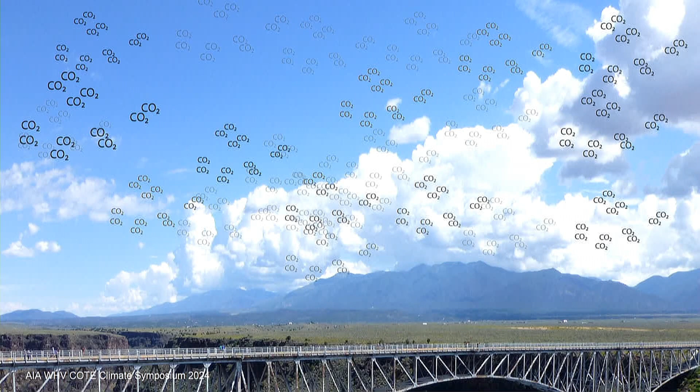Water vapor is also a greenhouse gas. Water vapor and stratiform clouds contribute nearly three-quarters of the heat re-radiation, three-quarters of the greenhouse effect. Carbon dioxide is just 20% of the greenhouse gas mix. Though only 20% of the mix, carbon dioxide's greenhousing effect controls 80% of the impact.

Heat re-radiation from atmospheric CO2 increases air temperature, which in turn influences the air's moisture content. But unlike water vapor, CO2 neither condenses nor precipitates from the atmosphere. It stays there, re-radiating heat and enabling higher levels of water vapor, which do so as well.

This nebulous thing called embodied carbon is one of the few warming accelerants that we can minimize within this decade, something that everyone in this room can do.

What are embodied emissions? That depends on your perspective. To some, it's manufacturing emissions, the emissions associated with producing a product. That means from raw material mining through production and packaging and everything in between, from cradle to the shipping dock. To others, it includes transportation to the construction site, or maybe installation or maintenance, or repair or refurbishment, or disassembly and disposal, or preparation for eventual reuse.

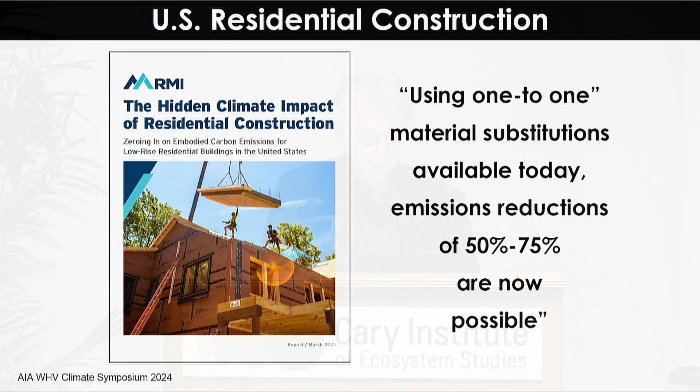Reductions like this are available in all phases of construction, and all of this starts with architectural design. The power to reduce those emissions resides with all of you. It simply requires your sensitivity to embodied emissions, plus some creative thinking. In other words, relating spatial, structural, and envelope design to material selection while cognizant of embodied carbon. The same is true for fittings, fixtures, and furnishings. We need to realize that sustainable design commences with low carbon construction.

Some of you might ask, with wind and solar and electrification on the rise, why this sudden emphasis on upfront emissions? To answer that question, let's cut to the chase. Let's connect a few dots. Let's look at carbon emissions and the warming timeline.

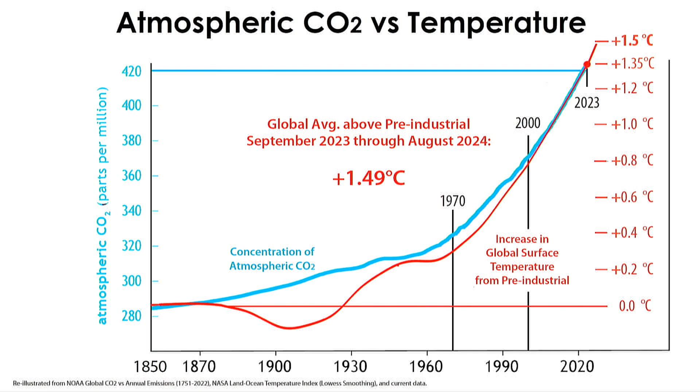I created this graph in March for a keynote at AIA's COTE Symposium in April. This is what it looks like now, updated through this August. A bit shocking. The average for the 12 months through this August was even higher, 1.49 degrees Celsius above pre-industrial. We've continued to break global temperature records each month. These increases were driven by the increasing concentration of atmospheric carbon dioxide. Temperature increases are nearly linear now with the increase in atmospheric carbon.

But notice the blue line, the level of atmospheric CO2, it continues to climb. Why? Because CO2 emissions remain in the atmosphere. They are not reduced as emissions decrease. New emissions are additive. They will remain in the atmosphere for centuries.

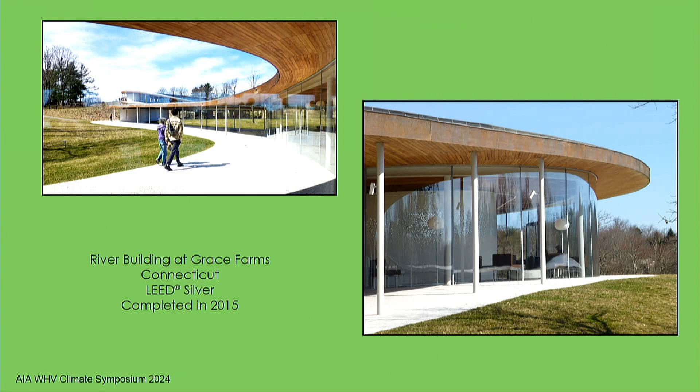Oh, how about those full-height glass panels? They were manufactured in Germany, then shipped to Spain to be curved, before coming to Connecticut. Sustainable design? What were they thinking?

This computer science building at Cornell University, my alma mater, was finished in 2014, a glass-clad structure with steel sunscreen appendages to block heat-inducing sunlight. This is the north side of the building. According to Cornell's Sustainability Office, these angular sunshades contributed to the structure's LEED Gold certification.

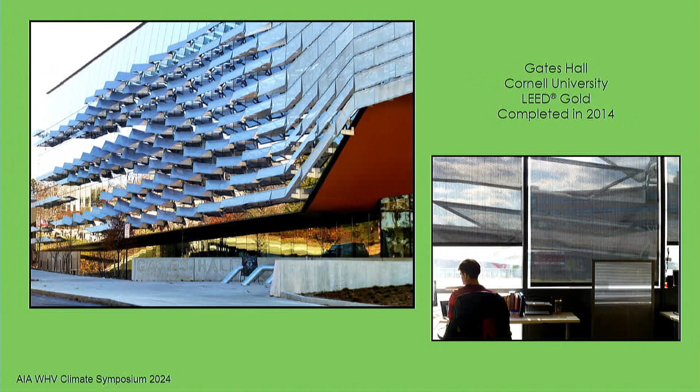Nonetheless, the intense sunlight from the east and south necessitated additional interior pull-down screens to screen the exterior screens, as you can see in the photo on the right. Why one would design a computer lab with floor-to-ceiling windows that admit sunlight and glare, I'll leave that to you. But it's hard to ignore the addition of steel sunscreens on the north side of a building in the northern hemisphere. Steel emissions are in the same league as cement, responsible for about 8% of global energy-related emissions. Was this just for aesthetics in the name of sustainable design? What were they thinking?

What about solar panels? Do rooftop solar installations generate enough energy to justify their embodied carbon footprint? Not this one in the Hudson Valley, shaded by trees. I hope none of you own this house. See, it may reduce the homeowner's electric bill, but this one is a net negative for carbon emissions, probably for its first decade of operation. And this is not uncommon.

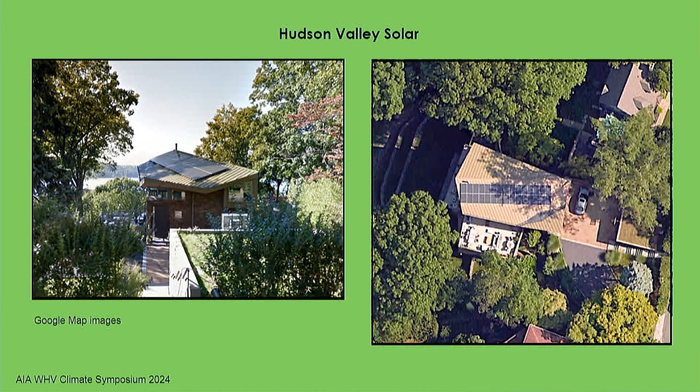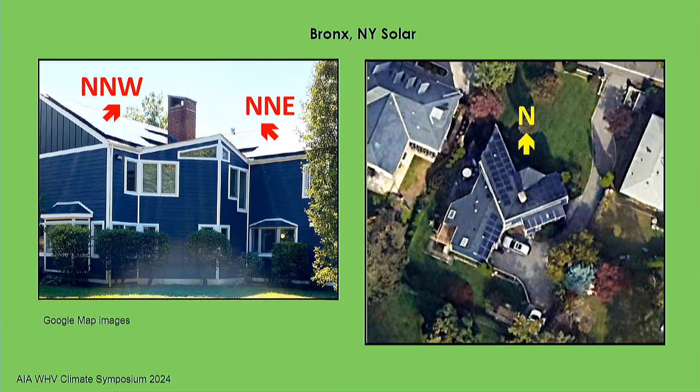Not all rooftop solar installations justify their embodied footprint. Southern regions in the U.S. receive sufficient irradiance, but northern states have 10 to 25% lower solar exposure. With shade from buildings or trees, or poor directional alignment, they will actually add to global warming for a long time.

For all of these projects, and numerous more like them, the answer to what they were thinking is simple. They were thinking about fluidity of design, in some cases perhaps sustainable design. The thermal mass of concrete, carbon sequestering wood construction, the benefit of sunscreens, and why not add solar panels? But they weren't thinking about embodied carbon, about upfront emissions.

So let's focus now on you, the professionals who design and construct our buildings and infrastructure. Let's borrow a phrase from our Department of Homeland Security: if you see something, say something, as early in the design process as possible, before it gets baked in.

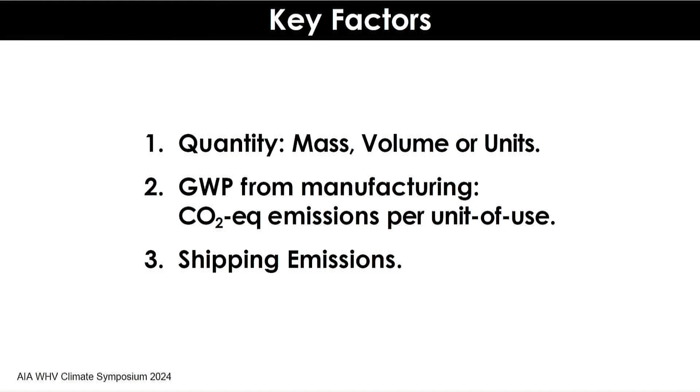How many of you have actually used EPDs? Show of hands. Okay, well maybe I caught you in time here because I'm going to tell you a few things about them. If you've tried but couldn't find many, you're in a majority.

Nonetheless, they will become obligatory.

How many of you are familiar with New York State Executive Order 22? Again, only a few. It covers new construction, 5,000 square feet or more, or significant renovations for New York State agencies or departments under the governor's authority, which includes universities. The exception is the Port Authority. Permitting requires that design teams calculate total embodied carbon, including from shipping and for transportation and construction equipment.

Bidders are required to submit EPDs when available for covered products. Executive Order 22 has been in effect since January 2023. New York City followed in similar fashion with Executive Order 23, requiring submission of EPDs for concrete and steel to Building Transparency's database. EPDs are also required for IRA funding and Buy Clean programs.

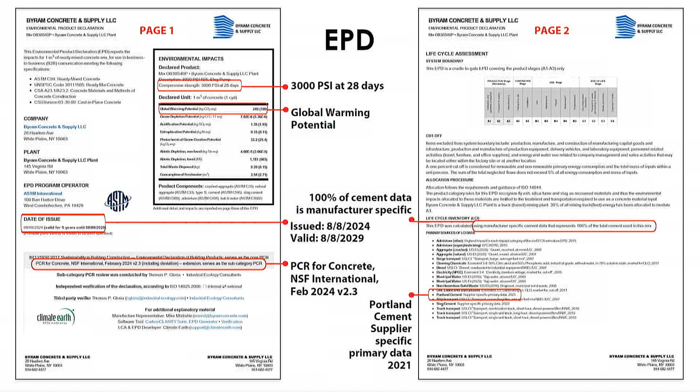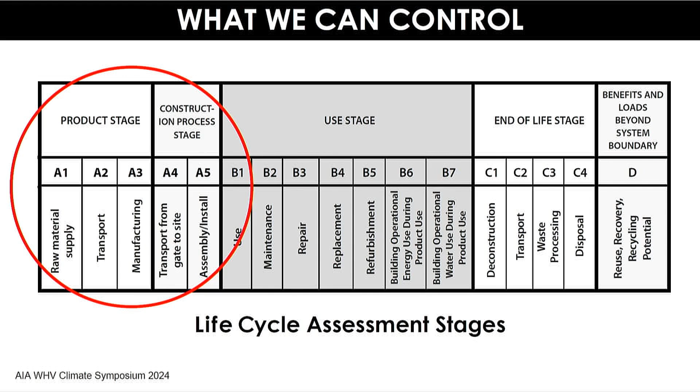Modeling is crucial to sound design decision making, from structure and envelope to environmental control systems, and a host of other parameters. How do we handle the EPD problem? Modeling and detailing are at different ends of the spectrum—that's if you model to design rather than model what you've already built.

Industry or manufacturer average EPDs or database averages are sufficient for modeling design schema comparisons, whether for the structure, envelope, or interior. A GWP estimate for modeling can be determined from most EPDs, even for those which may seem somewhat misleading. Just be sure to factor in the caveat.

Comparing design approaches can be accomplished with generic information, but detailing is another matter. Ultimately, success or failure of a low-carbon project will be cast by the structural and aesthetic decisions carried out through detailing and locked in by a spec writer. And that's when emissions comparisons become critical, ultimately relying on the veracity of specific EPDs. Until we have a sufficient supply of EPDs and widespread comparability, low-carbon design will rely on your creativity and your skill sets, your design and material choices.

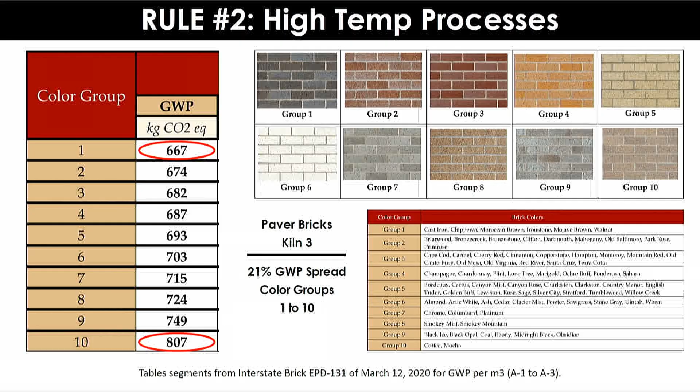Rule of thumb number 3, check a product's material content. You can't tell a book by its cover. Many construction products are composites of materials, such as for roofing and siding. The principle of mass applies here too, the mass of high GWP constituents. Of course, whatever the product, let's not forget transportation emissions to the construction site. But if you can only handle one of the above, make it rule number 1, use less.

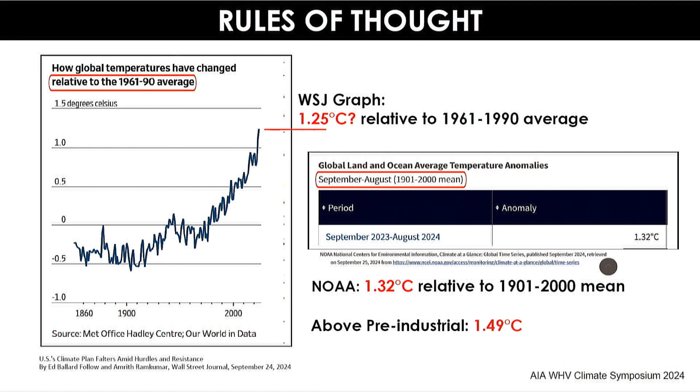So we have choices. We can ignore the details, comforted by our faith in the press, and install green appendages to please a client or as a feel-good green. Or we can meet the letter of new building codes and new climate regulations rather than the spirit. But none of this will reduce carbon emissions soon enough to make a difference. We must take it upon ourselves to act.

I came across an excellent report that might help, published by the World Business Council for Sustainable Development: Net Zero Buildings, Halving Construction Emissions Today. The report provides excellent strategies to reduce embodied carbon. It's available for free download at wbcsd.org. I highly recommend it.

For a more complete picture of the mindset we need going forward, and how our love affair with all things green and sustainable got us here, my book might help: Thwart Climate Change Now, Reducing Embodied Carbon Brick by Brick. I wrote it to be a solutions-oriented eye-opener.

It comes down to our creativity, to our personal decisions. With approximately 120,000 registered architects in the US alone, about 3.2 million estimated worldwide, we can make a huge difference. And that doesn't include interns or other design professionals and the rest of the AEC industry. This is an enormous amount of specification power, capable of minimizing upfront embodied emissions through low-carbon construction.

Keep in mind that embodied emissions from construction materials are released years before a building is ever occupied, years before infrastructure is ever used. That is why your ability to cut upfront emissions through design and by material selection matters so much, why it is so important.

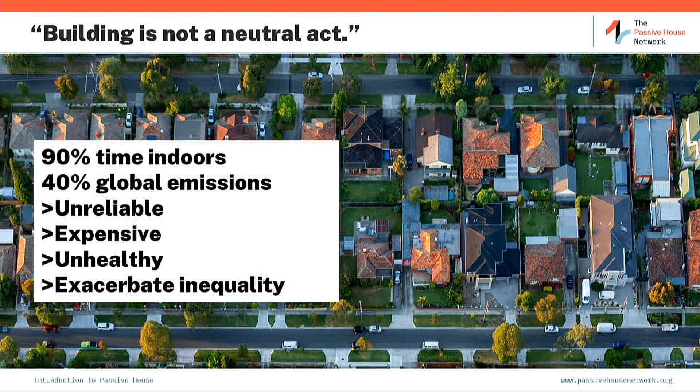So we have our engineers oversizing mechanical systems as a perfect illustration. Nobody trusts that the building will actually operate the way we think it will. They tend to run more expensive than we think. They can too often be unhealthy to the occupants and exacerbate inequality as we see the disparities in investment in our physical structure and everything that happens around that. So all items to be addressed.

And we really do want it to start with the occupants. I liked the upfront talk by Josh, about human resilience as being a key part of this, and human health. And our buildings are a big part of that.

So basically, we're going to have two types of buildings: buildings that are prepared for climate change, that are helping mitigate and adapt to it, and those that are not. So one of the themes that we have is to future-proof our architecture. We want to build something today, and we can do it, that will last through the coming decades, which are going to be quite harsh.

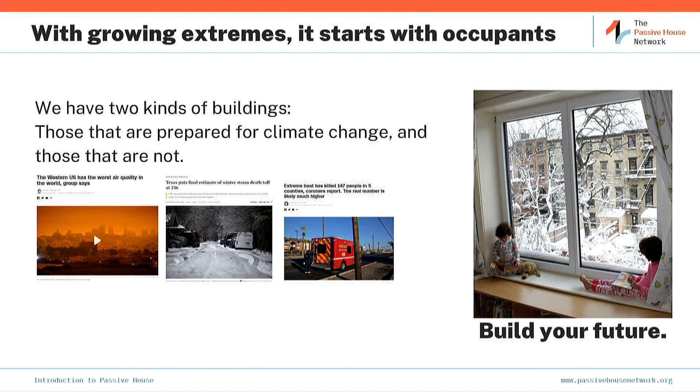And I think an interesting thing for me in getting into it, and for many, is that Passive House is focused on energy efficiency as a driver of building performance. But there's a realization that efficiency wasn't necessarily about sacrifice. It wasn't really about settling, which we can sometimes think of it as. It really can actually drive fundamental performance.

So things like comfort and bringing down emissions, having health, sustainability, lowering risk. All of these things are goals that we want out of all of our projects, right? And efficiency can actually help us get there, and passive house as a methodology, which we'll dive into.

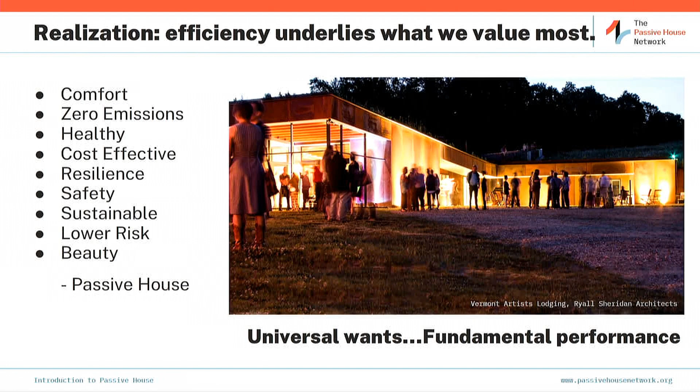Another aspect that excited me as an architect, I see it with other architects and builders and everyone in the projects, is that it's empowering the architecture again. You know, before World War II and the advent of mechanical systems that could compensate for really terrible building enclosures and generally building design that disregarded the environment around us.

There's a tradition of vernacular architecture, medieval, ancient, indigenous architecture that engaged fundamentals. And it allows us to re-engage those fundamentals. It empowers the building elements first before we go to the mechanical systems. It gets us back into the details.

We'll talk about how we're really using the same bricks and mortar, and we'll talk about the upfront carbon a little bit. But how are we using those things? So it's putting, I would argue, more power back in the hands of architects to use the structural design, the enclosure design, the form to drive the final performance of the building, and the builders along with it.

Empower electrification, we hear a lot about electrification and renewable energy production. The fundamental issue with our status quo, moving to electrification and renewables toward a net zero home, is that our demand and production are not in sync with each other, and we're inefficient in how we're using the power.

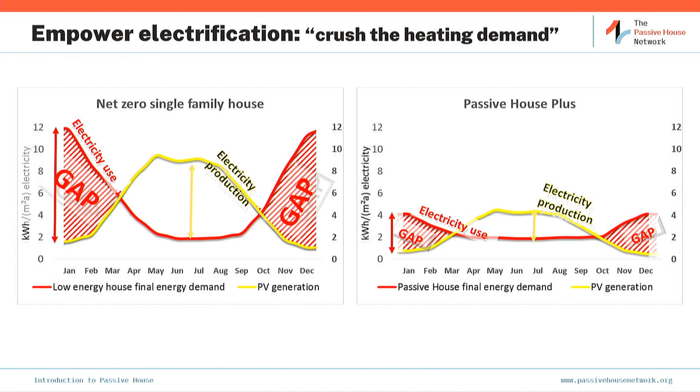We can lower the electric renewable production and kind of tune it to the future renewable grid, because today—this is from California, hopping back and forth, but indicative enough—space heating is really dominated by fossil fuels, right? Hot water also as well.

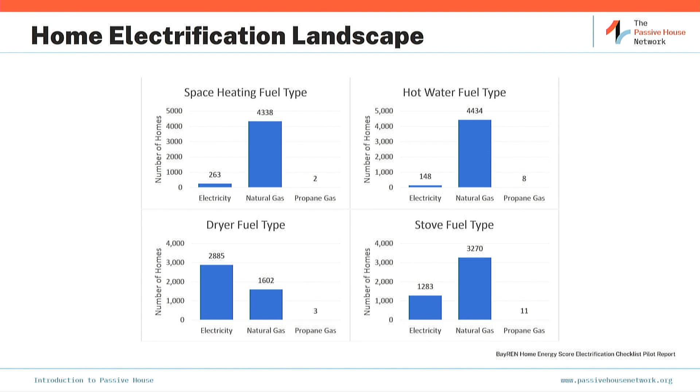And so as we move this towering demand over to electricity, what are the effects that it's going to happen? Now, Massachusetts has recently mandated—they've moved away from EUI, won't get into too much detail—but they've mandated what is called TEDI, Thermal Energy Demand Intensity. It's basically the heating and cooling of the building that's going to drive their building code for commercial and larger buildings. And for multifamily buildings, for the jurisdictions that adopt it, passive house certification is actually becoming a requirement for multifamily over 12,000 square feet.

That's one hell of a thing for a state to do and to regulate, especially this. I mean, it's late, as Bill pointed out, but it's still early in some ways in terms of the industry adopting this.

And Massachusetts' infrastructure is not prepared for this. Nobody's infrastructure is. They're looking at tens of billions of dollars of investment just to get through the next decade. So what they see with Passive House in crushing the heating demand is a grid-friendly way to develop buildings going forward. It's actually an investment in the grid through better building.

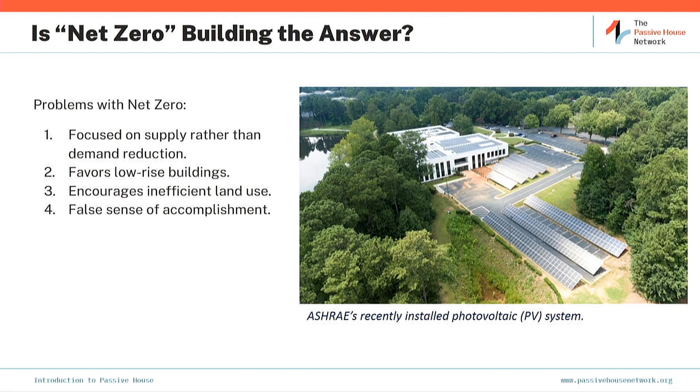So I'm not here to rail against net zero per se, but to say that some of the conventional received wisdom in terms of how the market is moving and what people are asking for—like if the client wants to have solar panels on the building, we're going to end up with solar panels on the building—we could have a wider conversation about that.

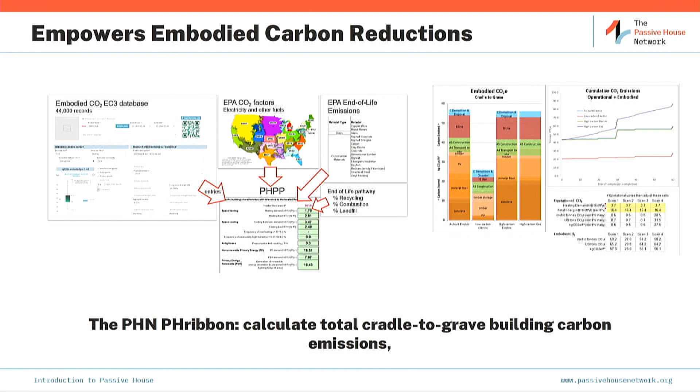Addressing embodied carbon is hugely important—upfront carbon in particular, from the manufacturer to the installation. In Passive House we have a tool called the PHribbon, pulling from the EC3 Building Transparency Database, so the information is as good as what is being supplied. But you can actually look at the embodied carbon outputs of the building design along with the operational energy, so you're getting a more complete picture. One key aspect is material substitution—we want to use less. Less is more, but also substitute materials. We can add more insulation if the insulation is actually zero emissions, or even negative emissions, and help at the end of the day with the overall carbon profile.

This is not core to Passive House, but Passive House practitioners often do it out of a mission around climate, as well as other benefits. Upfront carbon concerns are a natural pairing with it. And we want to note that it works with all the other codes and standards—you don't need to pick and choose, though you can if you like.

This is the Winthrop Center Tower in Boston, completed the other year—the world's biggest certified office building, over 800,000 square feet. They did LEED Platinum and WELL, as well as Passive House. So we want to look to that—blending whatever makes sense for your project.

This is the heart of it, in a way—what Passive House does in transforming it is like we've got basic ingredients of building, like cooking. It's how we use those fundamental elements that really matters. I really like this book, Salt, Fat, Acid, Heat. If you know how to manipulate and use these basic elements of cooking, you can make a great meal no matter what is getting thrown at you. You know how to bring that out of the ingredients for the food.

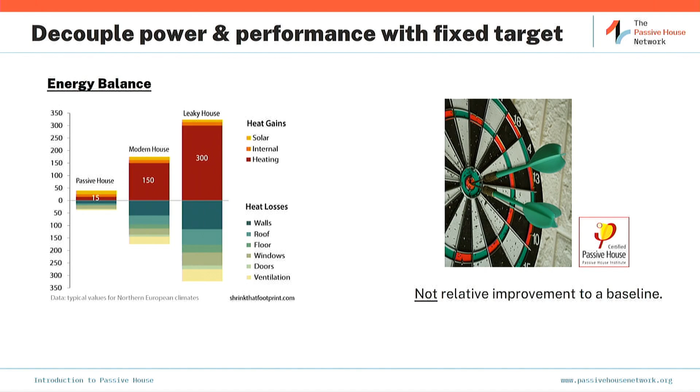Modern houses are doing better, cutting it down. A passive house really pushes it down to this physical definition and crushes the heating load, as our friends in Massachusetts say. So this reality then is something that we want to make predictable.

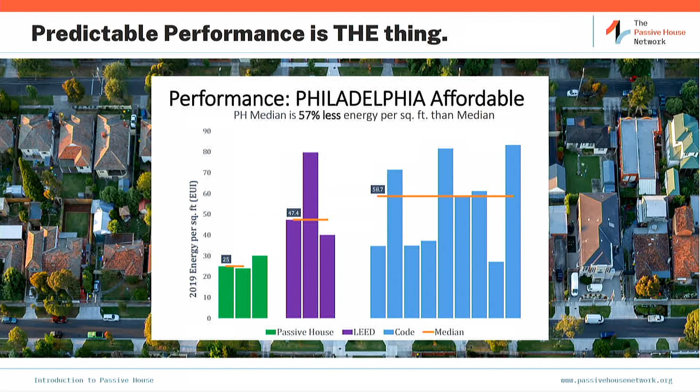It's not really locking it in the way that we need for predictability. A passive house is lower, and it's in a lower level of variation between the worst and the best. And it allows you that predictability in the outcome through the methodology.

Another interesting aspect, which we won't go into a lot here, but you can look at EUI, you can look at the operating carbon emissions of the building through passive house. It's not that it doesn't exist, but the focus is shifting to its compatibility with the all-electric, all-renewable power supply. So we are saying, yes, politics may have a way of making it a very bumpy road, but we're going to an all-electric, all-renewable reality in the not-too-distant future, if we have any sanity.

And so how well does our building function aligning with this future? It's not really about the emissions of the production anymore, although we want to minimize the amount of those solar panels that we're building, minimize the number of windmills, minimize the number of dams that we need. It's really the simultaneity of the use, depending on the use, on a daily level, but also on a seasonal level, and reducing short-term storage needs and losses, and then long-term seasonal losses, and minimize those inefficiencies.

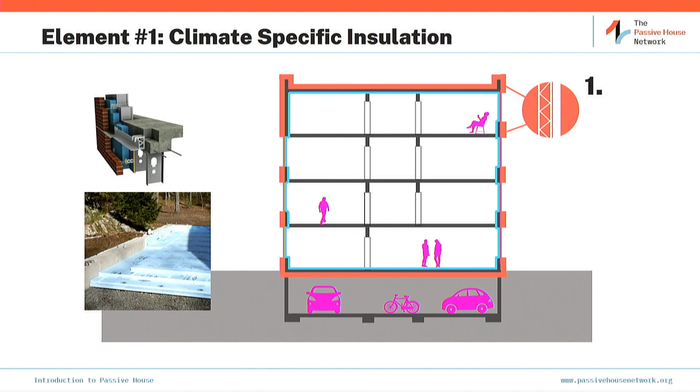Like many of our kids, we want to wear a parka and a hat and gloves and a scarf, and know that we're dressed for the weather. We want our buildings not to be like the kids in hoodies, or adults in hoodies for that matter, but dressing for the weather, like a climate-specific rated sleeping bag, perhaps. Again, minimizing that heat load requirement.

Thermal bridge-free construction is one of the fascinating things. We don't want to undermine the insulation. So studs repeating, and metal studs with insulation in them, can be horrible thermal bridges. But where it gets more interesting is at those connections, between the wall and the floor, the wall and the roof, where structure comes through.

So here's an example. Again, not rocket science here. I mean, there is some math going on in the programs and whatnot, but you have some insulation coming here, and underneath this floor and wall, they have a piece of masonry supporting it structurally, but its thermal properties are bad. It's creating a thermal bridge. It's not acceptable. We don't need to go into all the details of it, but to say that by simply changing out one material for another, in this case aerated autoclave concrete block along there, we can change the thermal dynamics of that corner and eliminate that thermal bridge.

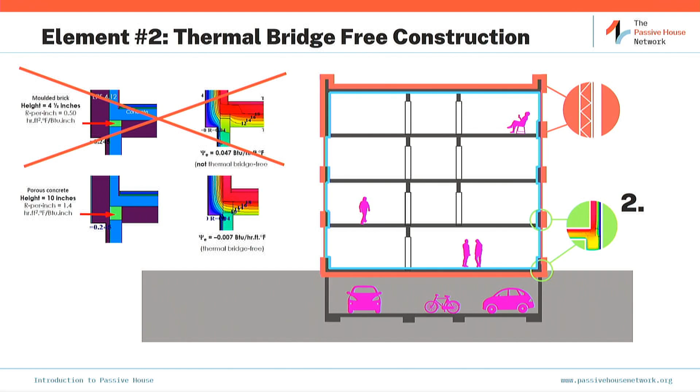Adding up all these thermal bridges and putting them into the energy model, they can have a gigantic effect on the overall building energy use. And it's one of the reasons why mechanical engineers will want to oversize the building's mechanical systems.

They can also undermine comfort and health. If we have thermal bridges and the interior surface temperatures aren't high enough, and we have relatively high indoor humidity, we can have condensation and mold and things that drive sickness. We have energy loss.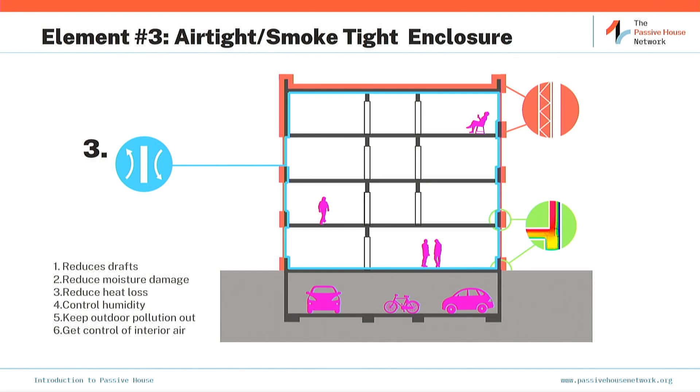Like a windbreaker over a fleece sweater, it's enhancing the power of the insulation as well. Think of the windows and doors as climate specific; they're extensions of the insulation layer, of the air tightness layer. So typically in this environment, we're going to have triple pane windows. We're going to have truly thermally broken frames. It could be of almost any material and construction type, depending on the project and the specifications.

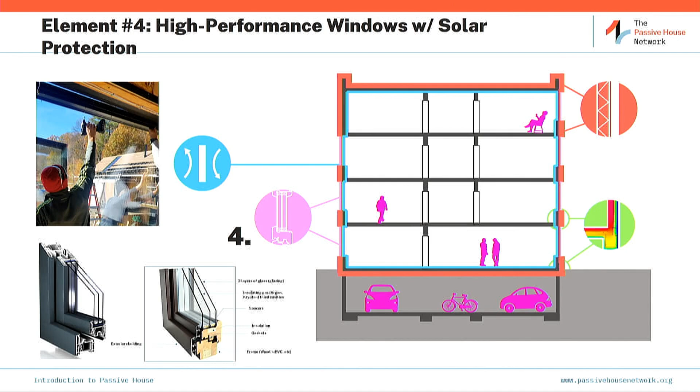We're not using them just for views. We are using their passive solar collecting ability to help provide passive heat gains, but we don't want to over-rely on them. We don't want to overheat the building unnecessarily. And so part of that is to be really cognizant of what we're doing with the orientation of the windows, but also have solar protection.

So use all your space comfortably. You can go right up to the windows. Yeah, big driver here.

So basically, with typical windows, the surface is going to be too cold, right? You're going to have convective currents, and you're going to feel the radiation loss off of your body. We need to put mechanical systems at the perimeter. With a passive house, we want to bring up that surface of the window close enough to the indoor air temperature so that you're not feeling that thermal discomfort that has to be overcome with mechanical systems at the perimeter. Consequently, we can pull the mechanical systems back to the interior.

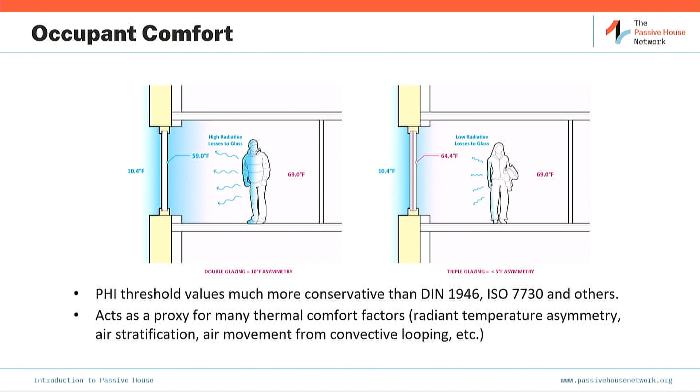Here's the shading. So shading, we want to consider and include it. Going pre-World War II, modern architecture back in the day had lots of built-in shading. Think of great Corbusier projects. They were terrible thermal bridges perhaps, and the upfront carbon wasn't so good, but he had the shading in, and we really need to bring it back in a big way to have the focus on that.

Thinking about the landscape, architectural elements, the window pockets. You can have occupant-controlled shading, of course, but the less occupant-driven performance, the better, obviously. So really, again, investing in the architecture.

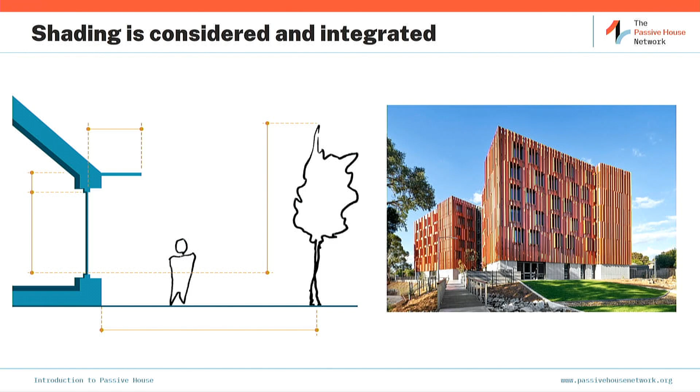All right, so those 4 things give us the basic envelope enclosure performance, the basic elements of that, and then the ventilation.

So the ventilation is being supplied 24/7 to all the served spaces. Fresh air is coming in, filtered fresh air. It's going into the bedrooms, the living rooms, the classrooms, the offices, the conference halls, and being exhausted from the service spaces: the bathrooms, the kitchens, the utility rooms, hallways.

It's balanced, and it's relatively low flow for what you would imagine, because we have control over that air now with the air tightness. So it requires a very small amount of energy to maintain a high level of quality. And with that air, we're going to recover a ton of the heat that's coming through.

Yeah, fewer allergies, less asthma, more healthy.

And what's happening in terms of operation is just a fan, like our bath fan or kitchen fan. It needs to be a very efficient fan, but the heat recovery is happening as the extract air is going through a heat exchange core, passing by the supply air. And we can now recover over 90% of the heat.

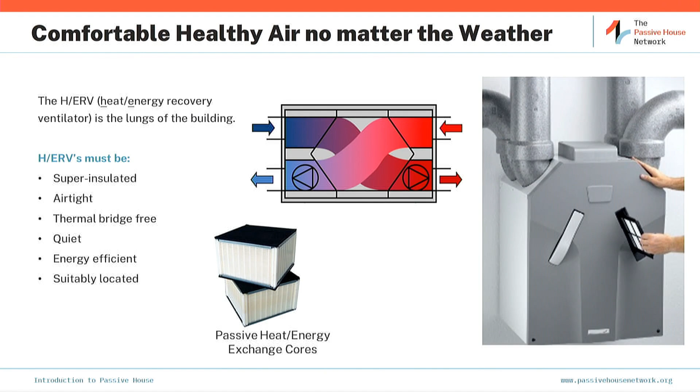So even in the cold of winter, you have fresh air coming into the room within a few degrees of the interior. You're thermally comfortable. You don't need to compensate with heating or cooling for it. And the ventilation efficiency, once you dive into it, is hugely important in terms of the overall energy balance of the building.

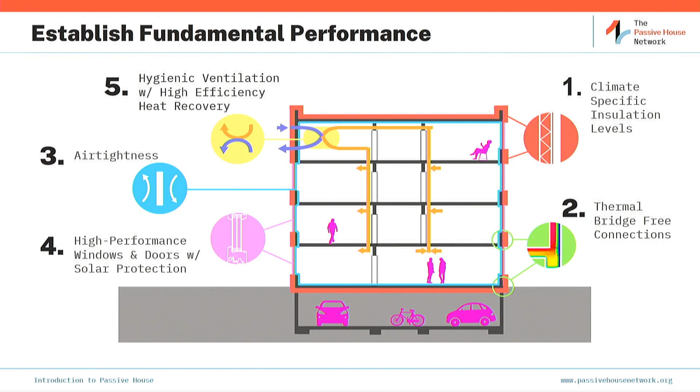basic elements, are salt, fat, heat, and acid of building.

So those are the basic elements. Then we've got control, then we're right-sizing the heating and cooling. We still need them. Passive houses do have heating systems, they just should be really small heating systems.

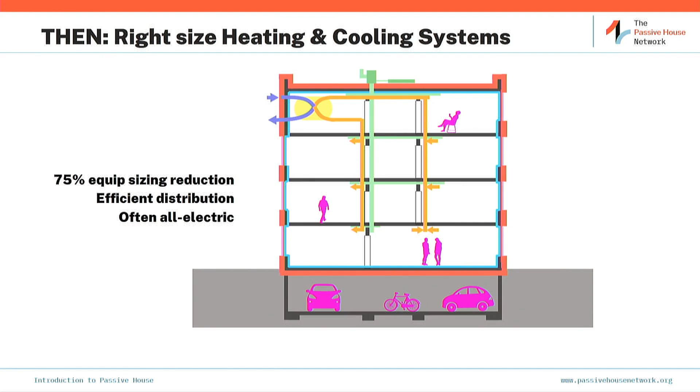So we're looking at typically a 75% reduction. That house that I got when I started doing passive house was a retrofit of a 5-story townhouse in Brooklyn Heights. It was like 5,500 square feet. It was a big house. And all the neighbors, similar houses, had 12 to 15 tons of air conditioning on the roof of the building.

And it was in a historic district, and there was nothing landmarks could do about it because it was the mechanical system. We calculated the heating and cooling demand, and we calculated that we needed 1.5 tons for our building, which is a really scary thing when your client's spending a couple million dollars renovating their new home, and you're saying, well, the equivalent of a window unit for a typical living room would be sufficient for that.

And it is the methodology and the calculations that give you the confidence and predictability to actually do it. Now there's variation, right, and that was at the optimistic end. So we did install 3 tons, but it's between 1.5 and 3 tons, right? It's really still a pretty flat line in terms of the use. Very happy to report that the house went through the summer heat and the winter cold fine.

So we want to downsize those systems. Typically they're all electric. We can have smart controls and renewables too, but we want them to come after we've made a great building, so they should enhance high performance, not compensate for poor performance. That's really the key thing: start with something great, make it better. Don't do something poor and say it's good enough because we've put stuff on it. So it's all about this optimization.

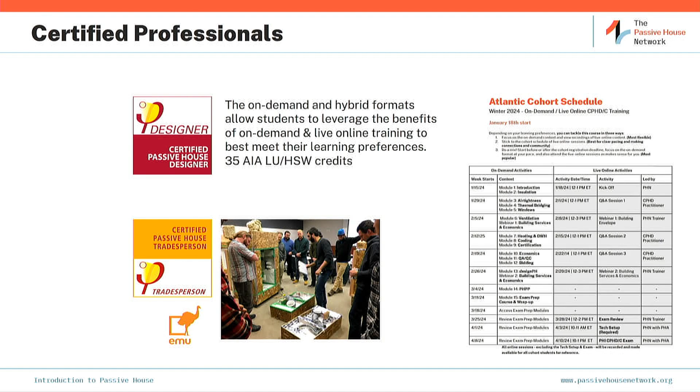There's also tradesperson in the PHI universe, certified passive house consultants and builders, a whole world of certified people working on projects. There's also components, which can be hugely helpful, especially the critical ones. We talked about the windows, the ventilation system being really incredibly important. These have been tested, and the specifications are in the models, which helps with predictability.

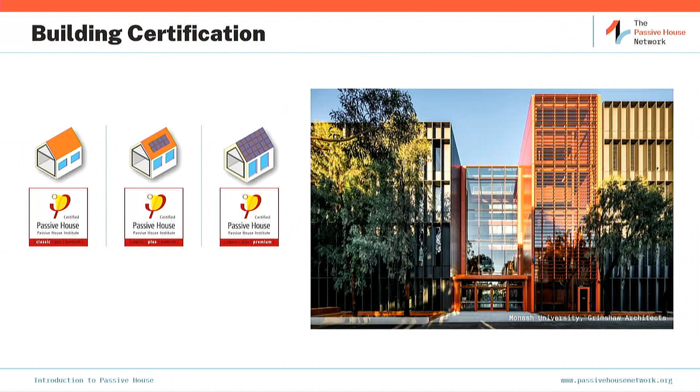And then building certification—I'm not going to go into the building on the right, but I'll note it's by Grimshaw Architects in Australia. It does not look like a passive house, I'll tell you. It's a huge building, worth looking up. But there are different certification levels and different types with renewable and electrical balance included.

So just a quick run through some examples to show that anything is possible. We're still dealing with the physical reality—architects don't have too much of a problem, once out of school, dealing with gravity. We have to deal with gravity as architects, but we need to treat energy the same way and see how our designs are reacting.

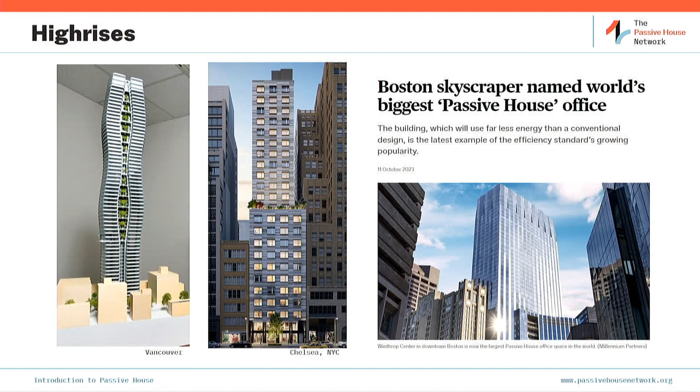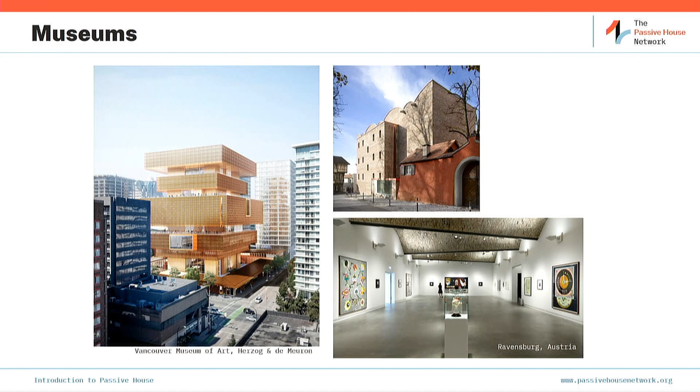We'll see if this one on the left ever gets built—it's been through like 100 iterations that really have nothing to do with Passive House. Most of the time, when I'm talking to somebody and they're venting, their Passive House vent comes to me. It's like, we're having this problem, that problem, blah blah blah. And we start to unpack this—what are we really talking about, what's happening here? More times than not, it's construction, it's design, it's clients, it's all the problems we have in making a building, which is really hard. It's not necessarily the Passive House aspects driving the problems, usually not.

Anyway, long story short, Herzog de Meuron is doing this big museum in Vancouver. The embodied carbon's not looking great at face value, but who knows what they're doing—they're a smart firm. The Belgian embassy in Kinshasa, Congo. An administrative building in Brussels—just all sorts of shapes and sizes. The university in Bar Harbor, Maine, College of the Atlantic, which is beautiful.

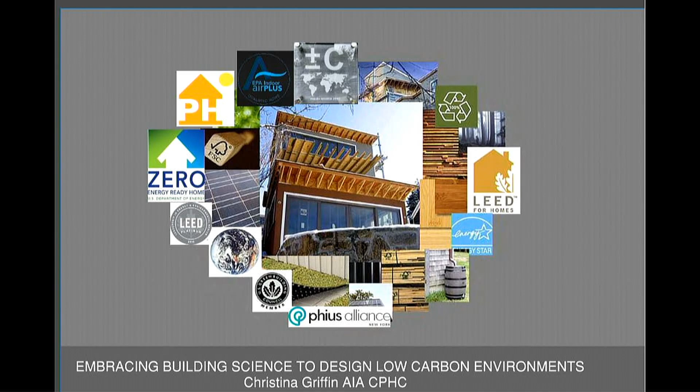Since then, I have been doing Passive House projects, and I'm going to show you 5 different buildings, each a different type of project: a single family retrofit, a very old 1815 building, a new house, a mixed-use historic landmark building, and a new mixed-use building. I'm showing this to inspire you to see how we can make a big difference, and how the Passive House standard can apply to any building.

And of course, these are all the logos I've been collecting of the different standards we've been following to get us to this higher level of sustainability.

A little background before I go further - I had a practice for 36 years in Hastings on Hudson. I've always had a commitment to environmentally sensitive buildings, since I studied architecture during an oil crisis. But that seemed to completely go by the wayside during the 80s.

I learned building science along the way, taking many courses. In 2012, I took the PHIUS course in New York City. Katrin Klingenberg was my mentor, and she said the architects should set an example - if you build, set an example with your own home, which she did actually. So I decided as soon as I had the opportunity, I would do that.

I downscaled my big house a few years ago - well, it's actually a retrofit. I've been using my house as a learning tool, giving tours and talks about it at the local library. I've also been doing passive house workshops in my office, and a variety of things to help promote building in a more conscious, energy efficient way.

But the thermal bridge free concept, I describe it as - if you're going outdoors in the wintertime, what would you use if it's like 10 degrees? You would wear a down jacket. So I compare a passive house to a down jacket, because we want a really well-insulated building with continuous insulation, as airtight as we can. So you'd have a down jacket with a hood on, everything wrapped tightly around your face and hands. A thermal bridge occurs when you have a gap in your insulation.

I try to make it as clear and simple as possible so they understand. If you have a stud wall house, which most people have, each stud is a thermal bridge unless you have some kind of continuous insulation. It's almost like going outside with a denim jacket that has little holes in it.

So this is my own house that I started out with - a little house built in 1905. I actually looked for a house that I could change and make into a zero energy passive house.

I've had tremendous support from the U.S. Department of Energy - I've reached out to lots of different sources to learn about building science, and they've given me tremendous support, and an award, and just recently another one. What I like about the US DOE is if you look at their website, they have the WUFI software for free. I started using that about 10 years ago - it's the WUFI energy modeling. They've really been a great support. This is the house originally.

I start out by showing them a few plans. This is the original house on the left, in gray, and the yellow around it is the new build-out and thermal envelope. So we wrap that entire house with a new structure, a new thermal envelope. On the right is the fully developed plan with solar panels on the southeast plane of the roof, and we have a rain garden in the back that helps take care of stormwater for the site.

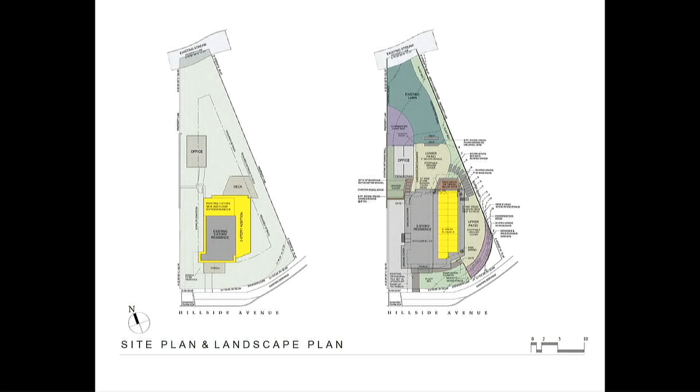We added space, going from 954 square feet to 1,700 square feet.

I show floor plans to my audience, who are mostly not architects, because I want them to see that you can have a really small house that can serve so many needs. If you look at it in a way that says if you conserve space, you conserve energy. So conserving floor area, you can do that by having a very open space. There's only 2 people living in this house, but we have 1 living space that's multifunctional, like before World War II, when most people had 1 living room, 1 dining area, 1 kitchen. All these spaces are located on the southern side of the house.

Orientation is critical because the primary source of heat is the sun coming through south-facing glass. So the front of the house has a porch with glass, and all the primary spaces we live in, and all the bedrooms, have south-facing windows. On the north side is where we located bathrooms, closets, and the side entrance.

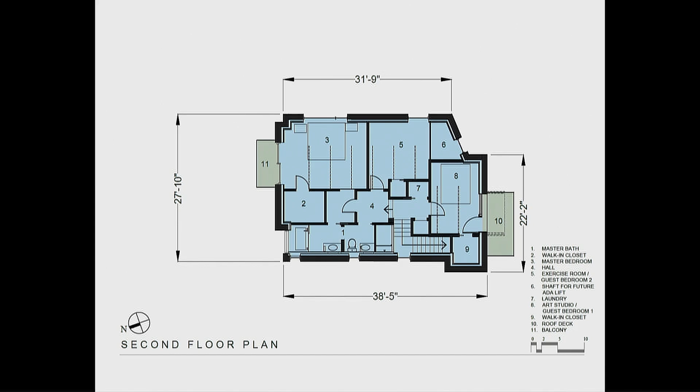These show that the design has a trellis and a porch, and inside the trellis, we found ways for solar shading of these windows facing south.

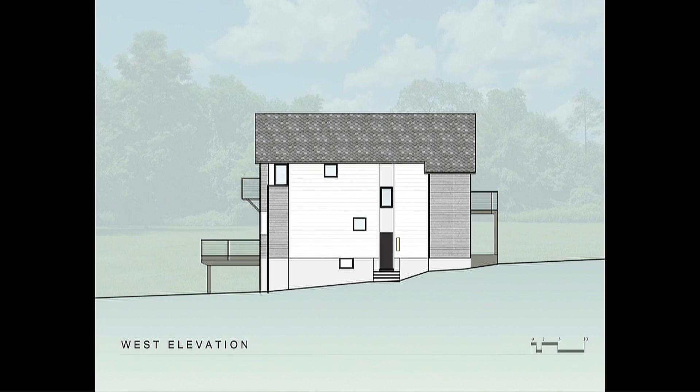We actually, to conserve on sending waste to the landfill, saved as much of the old house as we could. We saved 2 walls and the foundation because we didn't want to add concrete if we didn't have to.

This is just the detail of the thermal envelope. We have a double stud wall. I did this during the pandemic and wanted to keep it as simple as possible. We had 2 different contractors - the first tried to train their people but it wasn't so easy. The second knew more about passive house, but the stud wall kept it simple so any carpenter could build it.

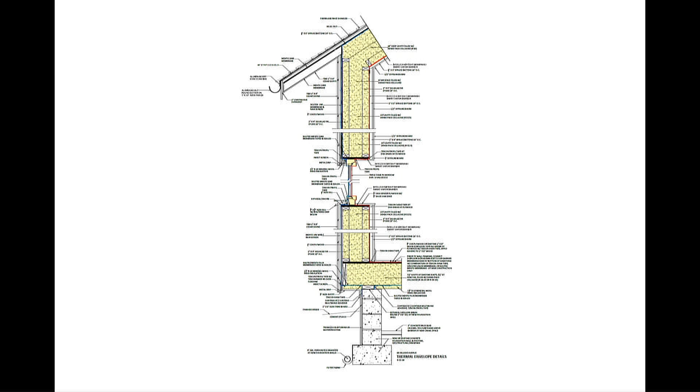We filled this cavity between the red line, the interior air barrier, and the blue line, the exterior weather-resistant membrane. Between those 2 membranes we filled it with dense packed cellulose, very much like a down jacket, where one membrane is for water resistance on the outside and the interior is an airtight membrane. You fill it with insulation.

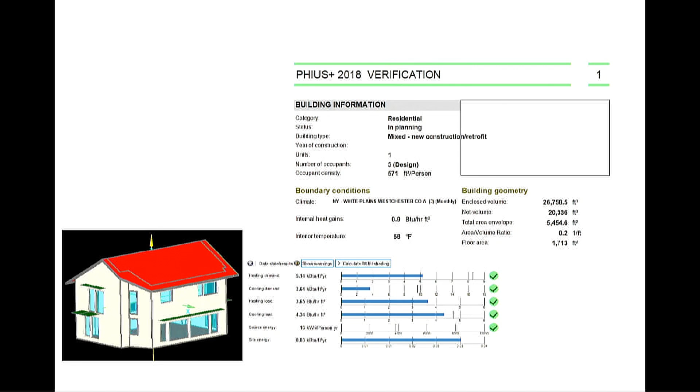This is the energy model we used, before the drawings were finished in the design phase. I start out by using a PHPP model to see if we're going to hit these targets. That helps determine where the glass is, how big it is, and it's all a matter of energy balance. So we had some glass facing northeast, but most of the glass faces south. You also see on the model our solar shading to help reduce the cooling load in the summer.

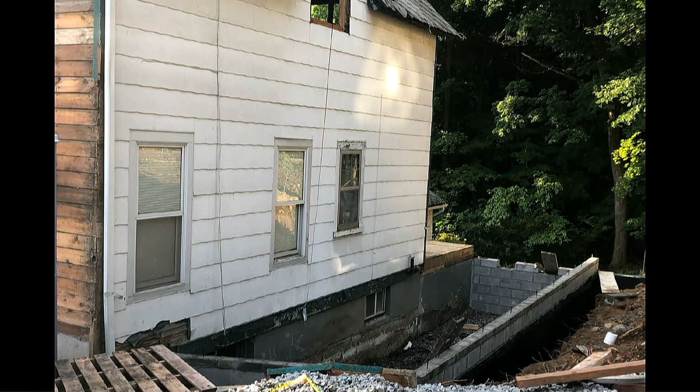This is the house when it was stripped. We decided we would save the framing on 2 sides of the house. We added 8 feet to the house, so we made it a little bigger than it was.

This is showing the double stud wall. The old house is in the back, and the new house is swallowing up the old house to create the new thermal envelope. We took out the sheathing and used cross bracing so that we could have continuous insulation between the 2 studs. Old studs are in the front, newer ones behind. Here you see all the studs, all this framing creating the envelope.

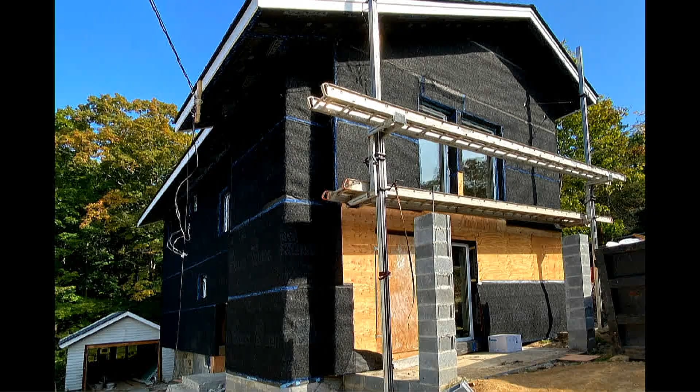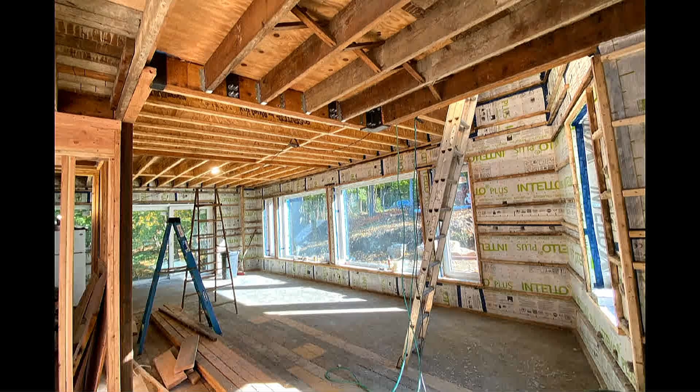This is our exterior envelope, the weather-resistant membrane, all taped and sealed. And this is our interior membrane. They call it a smart membrane because it's designed to allow vapor permeability, so if there's any condensation on the wall, it can dry to the inside.

You see all those horizontal strips of wood - this is to create our service cavity for the wiring. Second floor, you can see the interior envelope, the interior membrane.

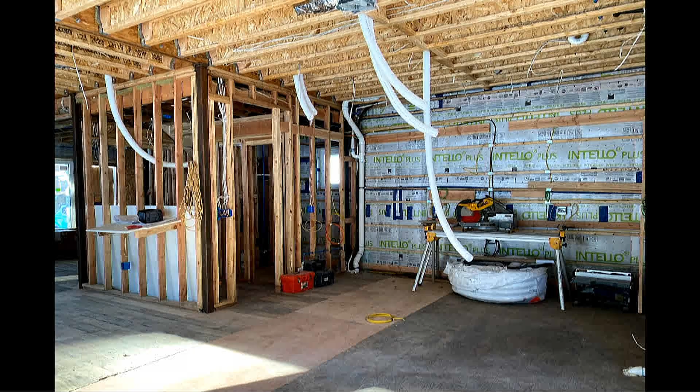Then we did our blower door test before we finalized the building, to make sure we're going to meet our targets. We sailed through - we had 0.02 CFM per square foot first test, but we ended up at the end with 0.05, and still met the passive house targets.

This is just these tubes falling down, coming from the ERV, the energy recovery ventilation unit. We have that up in the closet of the primary bedroom, and the tubes come down to provide supply into most of the habitable rooms, with returns from the kitchen and the baths.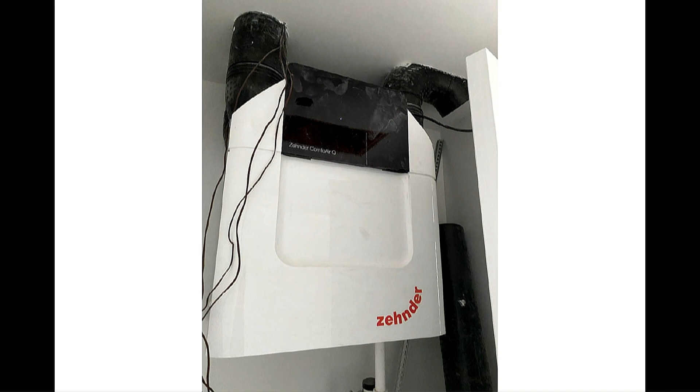This is our unit, which we had mounted so we could reach it. It's on the wall of the walk-in closet in the bedroom. We're so aware of this unit, and we love to show people how we use it and how we take the filters out. I really wanted to take the mystery out of passive house - it's a simple fan, really.

But I'm aware that we get about 1 air exchange per hour. So like during the pandemic, when people would come, we'd leave the house for an hour to feel comfortable getting back inside.

And this is all finished. We took out the entire lawn that was in the front and back of the house and put in a native garden.

What I think is really interesting about this image is you can see the amount of solar shading going on. We have the porch—this is probably in early August. We have shading from the front porch onto the glass next to the front door, and shading of that door almost completely by that trellis up there, about half at this time of day. I introduced this angle deliberately because I knew I'd get full shading of that tall piece of glass facing due south. Most of the year we have deep overhangs, and then a trellis on the side.

Just a few more photos of the house. I designed this trellis—very simply made. There's a bracket, a sample of this metal bracket, that I've given to different contractors to match. This was all designed using solar shading calculations, a very simple calculator you can find in various places on the internet, or from 475. By angling the wood like that, it completely blocks out the sun, and the depth of the trellis is based on this solar shading analysis.

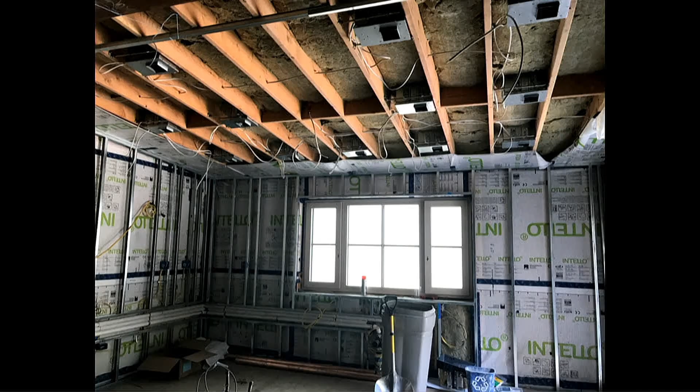This is such a great image because it was my client's idea, who had studied passive house, to hang the new structure—those joists running that way—from a big beam that's holding up the old stone wall. We ended up having insulation between the joists, wrapping underneath that beam and back up into the wall of the house, and that way we avoided a thermal bridge. The client, everyone, the head framer and myself were all knowledgeable, or became knowledgeable, and found a way to overcome these challenges.

This is the stud wall. I think we wouldn't use metal in the future, but he was a New York City contractor and had that material. We used dense-packed cellulose for the fill inside the walls, and then continuous mineral wool on the outside of the studs. This is a sketch on the right by the head framer, and this is my drawing on the left.

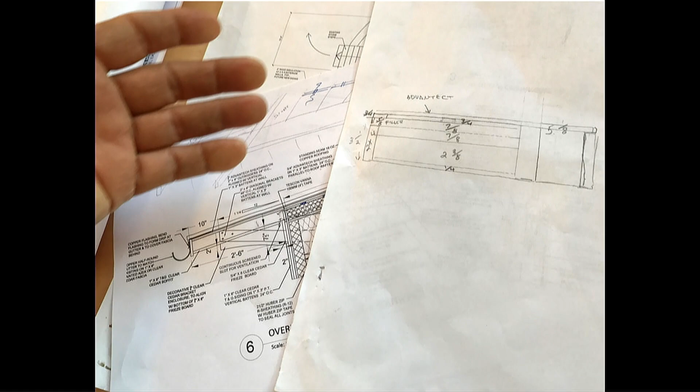I'm always amazed at the amount of collaboration that occurs to reach these standards, especially to overcome the challenges of thermal bridging. We have these decorative brackets added to the roof to mimic the brackets on the original old house built in 1850. He did this sketch showing layering the brackets with wood fiber rigid insulation to reduce the thermal bridging caused by this detail—those are the brackets you see under the overhang.

This is some of the views of the interior. This is one passive house where we've had clients who really want a fireplace, but this is a fireplace made in Europe that is airtight once it's closed. The owner is taking responsibility for making sure it doesn't open for long, so we can control the air and make sure there aren't any negative repercussions from using it. But he rarely uses it, doesn't need any heat. This is in the middle of the passive house standards.

This is another project, a new house, a LEED Platinum passive house zero energy project. This house started with an old house, and we kept most of the structure that was there, the foundation and framing, and built onto it. It was in terrible condition.

We had some fun with curves because the garage is outside the thermal envelope. We added porches because most of the orientation of the house faces southeast and southwest. This is our site plan showing how we developed the house so that we had one facade facing southeast for solar panels, with a wraparound porch for shading, reducing cooling loads in the front of the house.

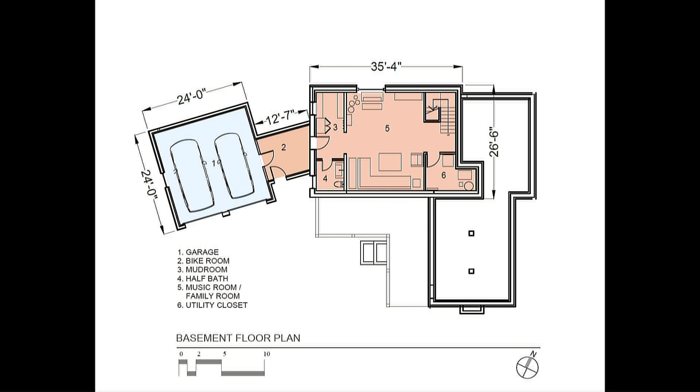That funny oval is a rain garden, which took in all the runoff from the site and the roofs. The floor plans show how we angled the garage to keep it away from the trees along the property lines, right up next to Teatown Lake Reservation, to make sure we didn't disturb the drip line and roots of those trees.

We have, in this house, a his and hers office. It's a bigger house than mine, with interior conditioned space of 3,500 square feet. And these are the elevations.

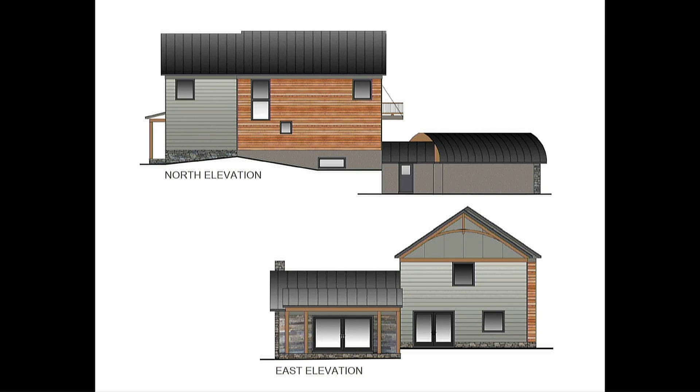On the north side, we've located bathrooms and minimized the amount of glass, and on the southeast and southwest sides we have a tremendous amount of glass. On the southwest, we took care to have solar shading with trellises and the porch to reduce cooling loads. The section shows that structure on the right is actually existing.

We kept that part of the house and kept the foundation. We have two membranes, exterior and interior, and filled it with dense pack cellulose. We actually put recycled EPS rigid insulation in the crawl space to complete the thermal envelope below the floor.

This is just a diagram showing general concepts following the 5 main elements of a passive house design: 1, thermal bridge elimination; 2, continuous air barrier; 3, thermal envelope; 4, high performance triple pane glass windows; 5, energy recovery ventilation system, which we actually moved up to the attic, with outlets going through the gable end walls.

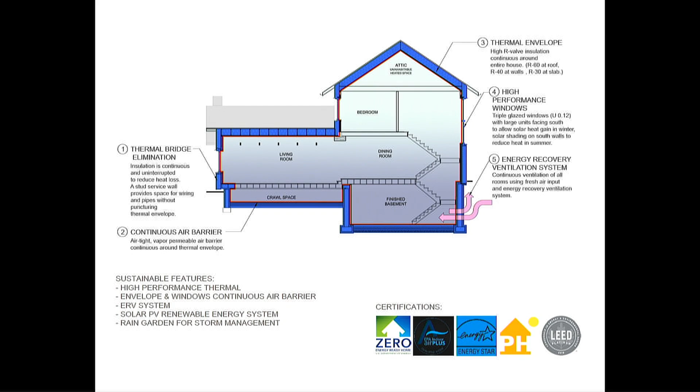We decided in our practice we're going to do it anyway. We present the options, and if a client is coming to me with a project, I'm going to show them how we can meet these high standards. A lot of it starts with the energy model. I'll do an energy model of a design very early in the design phase, and once we get that set up, we can look at different options to show them that if you don't do certain things, we won't hit the target. This makes them feel like they're part of the process and helps to spread the knowledge.

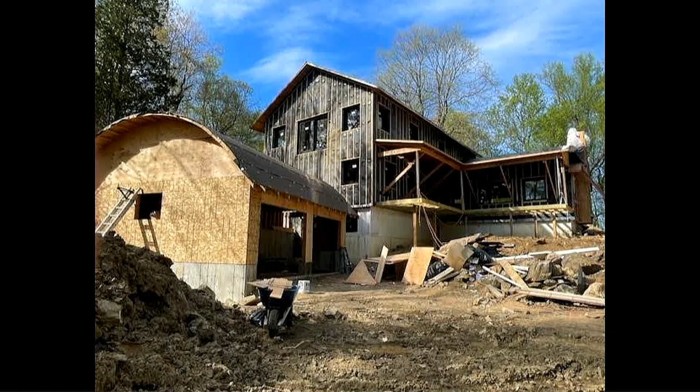So these are some images during construction. This is a Larsen truss. We salvaged as much as we could of the old structure, and we used a lot of the lumber from the old house as scrap lumber to create Larsen trusses. They're like homemade trusses used to build out the exterior wall and create the cavity for the dense pack cellulose.

This is our blower door test done during construction and then after construction. This is when we're finished.

Above you see the trellis detail, the same bracket in my house. And then you see how much shading of the windows due to where the window is set in the opening, also roof overhang, the trellis, and the front porch. And this on the right is an image of the landscaping.

We hired a landscape designer who only does native gardens. We completely reinvented that property.

This is the porch. This is a thermally modified ash decking, because we think in our office about what will not just get our points for LEED certification, but also just to be responsible for what we use, because this is not using ipe and those materials that come from tropical forest.

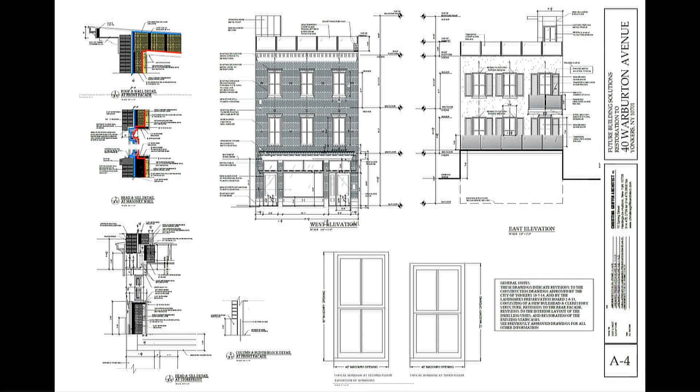Then between that and the red line, which is our interior membrane, is our cavity that we filled with dense packed cellulose. And then we have our service cavity. We always make sure there's a space for wires and pipes so we don't penetrate that thermal envelope. Just like trying to save that down jacket and making sure you don't put holes in it, which is going to really compromise the effectiveness of your energy efficiency.

This is the same building in the WUFI model. I added the buildings around it, which you see in these skeleton shapes, are actually buildings that are providing shade on the building, and it's very important to have that part of the model. All those arrows coming out is heat, showing that these are areas where you're getting heat loss from the interior space.

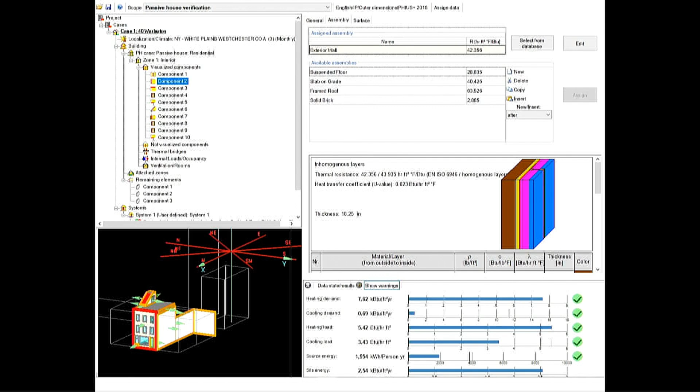I have found this a great tool to tell us when we're in the design phase if we're going to meet our targets, so all those check marks show that. When it comes to heating, cooling demand, heating, cooling loads, we are doing very well. Site energy, not so well, because this does not take into account any solar panels, and yet we're still meeting the passive house standard.

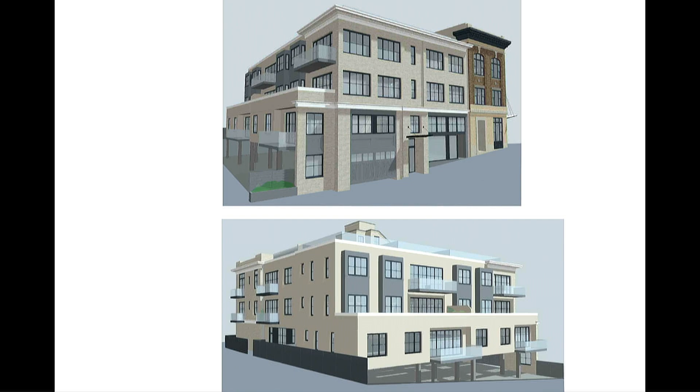And then we have a whole facade facing west. We will need a variance for that, but I'm hoping I can get that variance and add porches to this facade, because when you have west-facing glass, porches really help reduce the cooling load—much more effective than anything else because of how low the rays of the sun are coming from the west in the summer.

There's going to be 15 units here, and we are just in the early phase. I was hoping to get the model finished by today, but this is simply the beginning to help us identify the old building, new building, the areas of the building that will be in the thermal envelope. And when you do this model, you have to make sure all the lines connect, otherwise it doesn't even register—it makes you think about having a completely continuous thermal envelope all around the building.

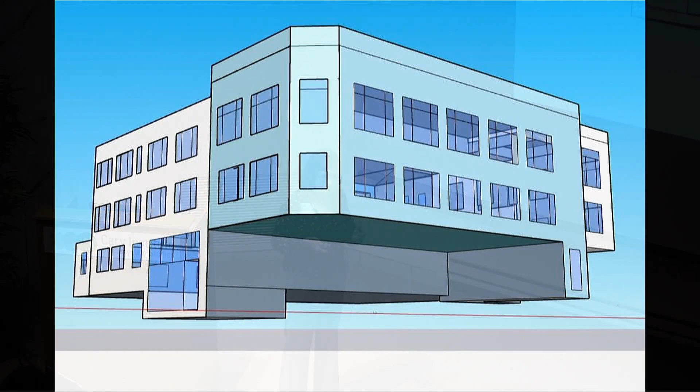Next step with this is this gets put into the WUFI model, and then we have a prototype for each one of these 5 buildings—a prototype for a retrofit, a new single family house, and a mixed use building. In the mixed use category we have about 3 different prototypes depending on the construction we want to use. Once you set up all your assemblies in the WUFI model, you can use the same prototype, pick the one that relates to the historic buildings for the old piece, and a different one for new construction for this piece.

This building's about 27,000 square feet. And I'm going to end with that because I wanted to show you how we're applying passive house principles for both small and large projects. I mean, for Westchester, large is usually not more than 3 stories.